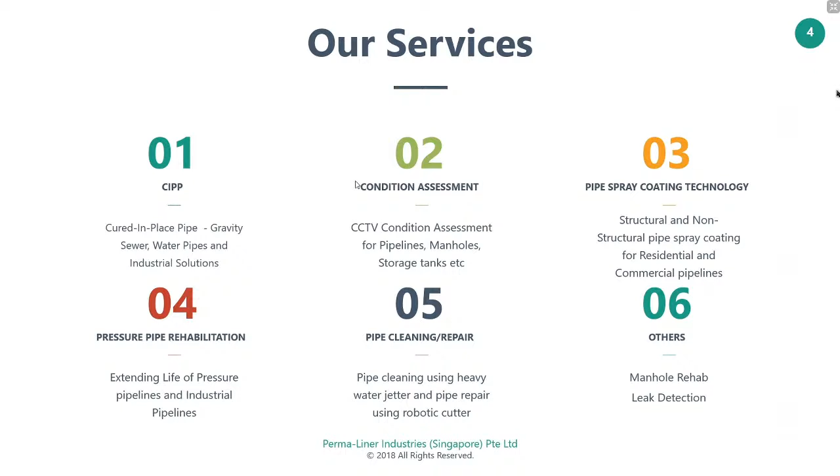repairing it. And apart from dealing with pipelines, we also deal with manhole rehabilitation and underground tank rehabilitation. Then in industry cases, we also undertake leak detection jobs, which I will show you in a case study we have done in Dubai. So first, this is our company introduction.

Okay, that was a quick introduction of our company headquarters. So we will start the topic. What is trenchless technology? Trenchless technology is subsurface construction work which requires few trenches or no continuous trenches. For example, if there is a pipeline of 80 meters underground, at 6 to 8 meters of depth, and there's a repair you need to carry out at 20 or 30 meters, you don't have to dig the surface and do the repair.

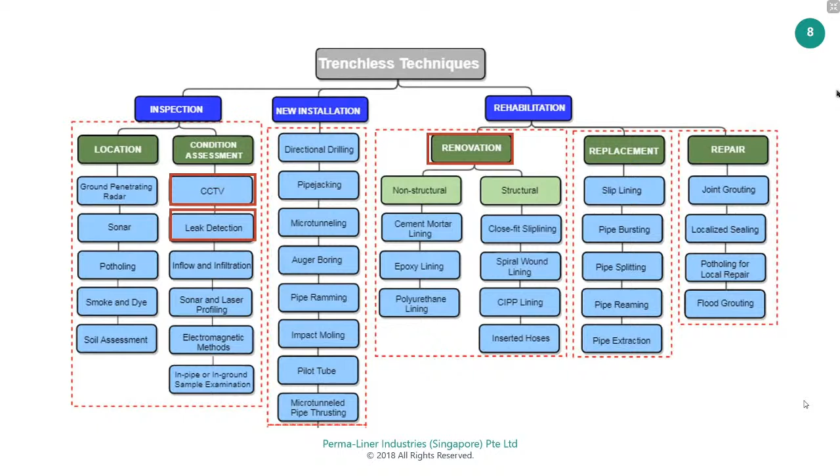So moving on to CIPP inversion lining system. So first I will show you the video, then we will go into step by step of how this method is installed. This CIPP inversion comes under renovation technique and trenchless techniques.

So in this method, for sewer pipes or whatever the underground pipe is, if the pipe condition is not good and we wanted to replace it, instead of putting the trench, we are going to do it in a CIPP inversion method system. So we will see a video of how it is done.

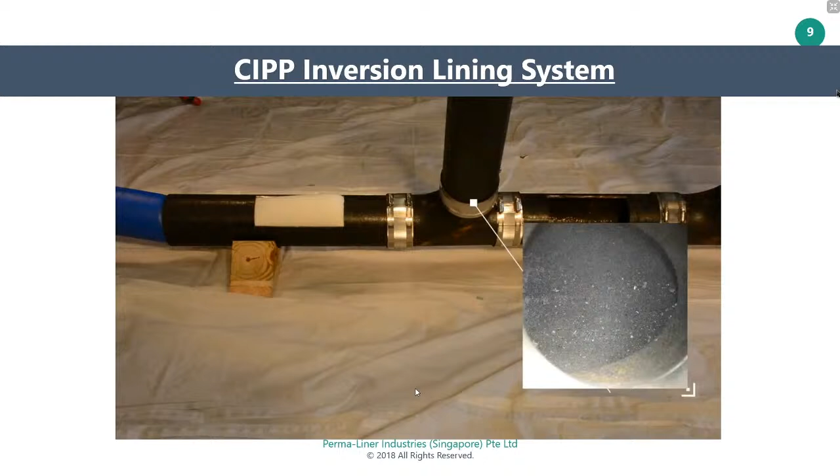This is how the liner goes inside the pipe. So when we give air, the liner inflates like a balloon and it starts inflating like this. So it reaches the other end of the pipe.

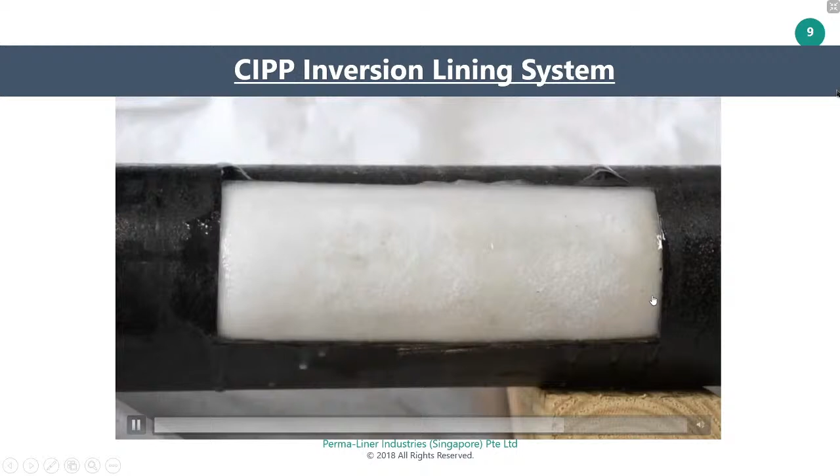So once we leave it to cure, it becomes so strong, and now once this becomes strong, the host pipe doesn't need to be strong, or it can crack or whatever happens. We don't need to care. So we basically form the pipe inside the pipe.

So once forming, we will send in this robotic cutter to reinstate the lateral connections. So this is how we will be doing it. Any lateral connections joining the main pipe will be reinstated back to their original position.

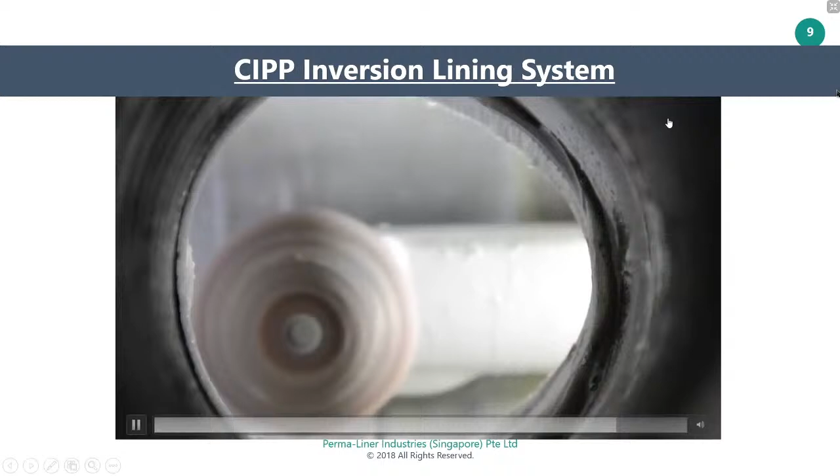So let me go through again. So first we do a CCTV inspection. So we will assess the condition of the pipe. Then after assessing the condition, we do the cleaning with hydrojetting, or we use any chain cutters. Later I will show. After this, this is the liner and the calibration tube.

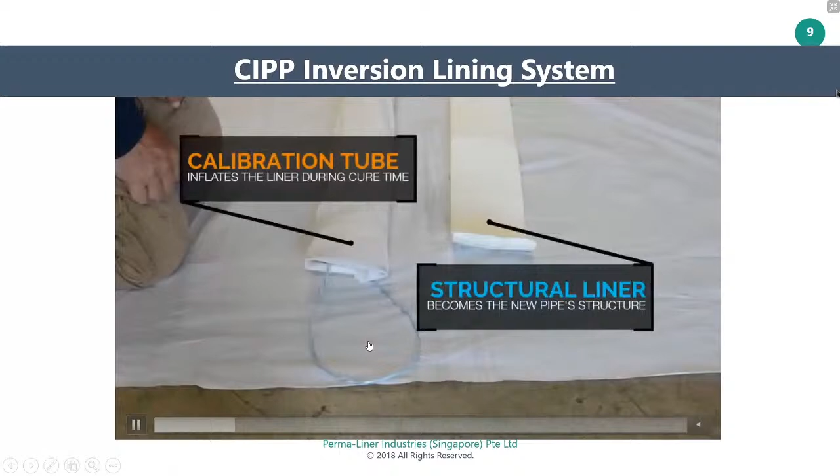So the calibration tube is to inflate the liner to the host pipe. So once we measure the liner size and calibration tube, we will pull it inside like this. You can see how they are pulling it. So once everything is pulled in and it is in place, now we start mixing the epoxy.

This epoxy is the main component here, because in epoxy there are always two parts, part A and part B. Part A is the resin and part B is the hardener. So usually in our system we use 2.6 kg per meter, 2 kg of part A and 0.6 kg of hardener.

And depending on the site condition, the hardener's quantity may increase or decrease. So once this resin is mixed, once you pour in part A and B together and you start mixing, your time starts ticking, because in the CIPP industry, it is like a time bomb. The time bomb means it doesn't explode, but if you mess up with this, your entire job will fail.

Because once part A and part B are mixed, the resin starts getting harder. Like how you do concrete work, once you mix the cement with aggregates, the concrete gets hardened, right? Similarly, the epoxy will also get harder. That's where the liner gets its strength from. So once the resin is mixed, you need to start counting the time.

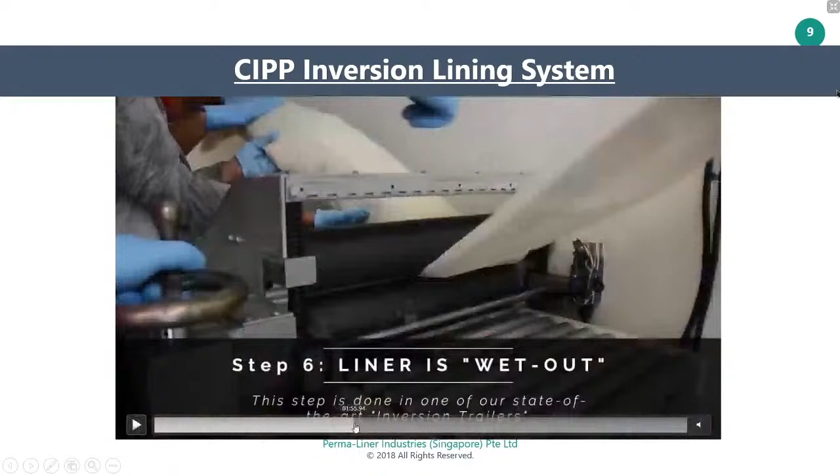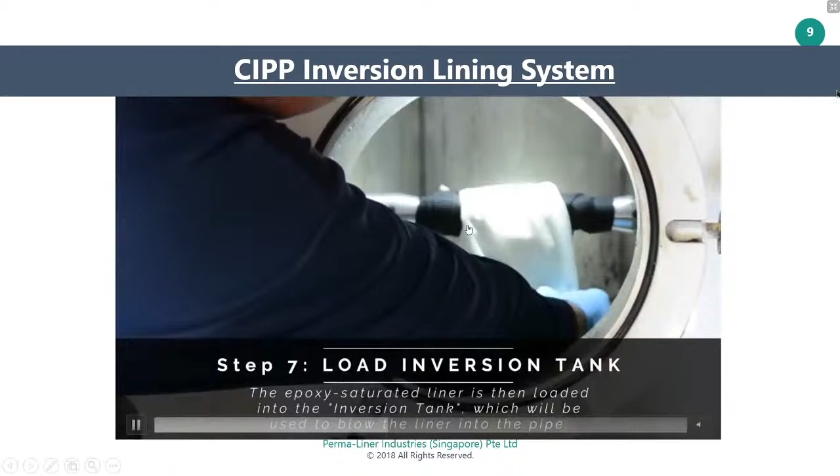So once they mix the resin, they pour the resin into the liner. After pouring into the liner, we will be wetting it out. This is the wet out process, and the machine is used for wetting out the liner. Wetting out is simply removing the excess resin from the liner. After it is done, we will insert the liner into our inversion gun.

This is called the inversion gun, the machine. At the tip of the inversion gun, just like how you put on socks, you clamp the end of the liner on the machine's outlet point. So we are clamping it here. After you clamp it, the end piece is fixed to the machine. Now you have to give air to the inversion gun. Once we give air, the liner starts to invert.

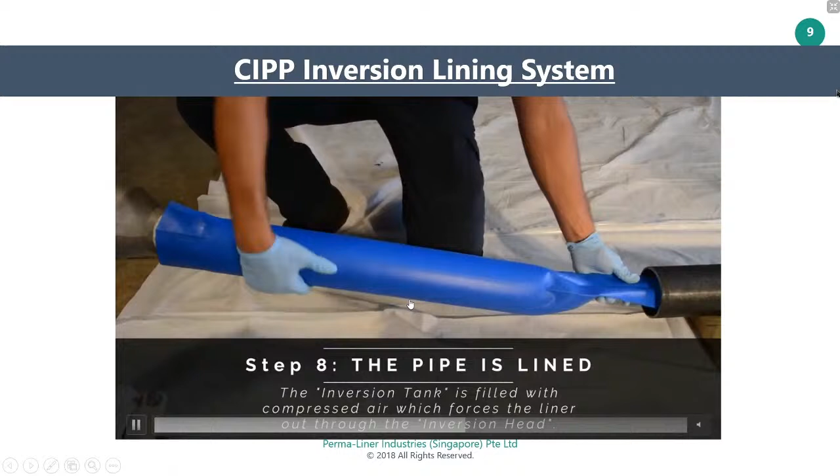So this is how the process is done, and this is how the name is given to it. We are inverting the liner. When air is given, the liner inflates itself like this, just like a balloon. That's the process going on here. Once the air comes in, it thrusts the liner outside, like inflating a balloon. And now you can see how it is flowing, how it is inflating inside the pipe.

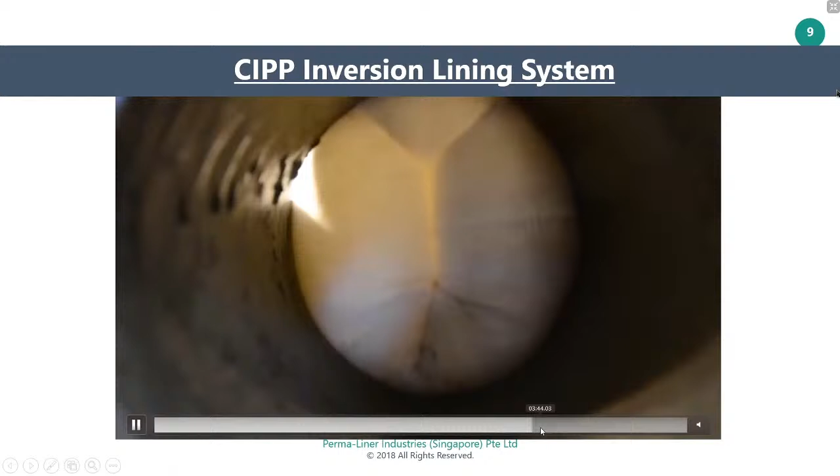So no matter the pipe size, whether 100 mm, 600 mm or 1200 mm, if you go with the inversion process, this is how the liner goes inside. Once it reaches the other end, we leave it curing for 2 hours. After that, if you see the surface of the liner, it will be hardened. So this is the basic thing.

And based on the video, you have seen the materials for CIPP lining. One is the liner, the calibration tube, then the inversion gun. Then we are using steam cure for this method. In cure method, there are a few options available. And for resin type, we use epoxy. These options are available for all jobs.

But depending on the site condition and the pipe condition, we will select which liner to go with and which installation method, whether inversion, winch in place or water inversion. In water inversion, instead of air, we use water to inflate the liner. We usually go for water inversion for bigger diameter pipes. And there is a curing method, ambient cure.

Ambient cure is nothing but... okay, I'm getting that the audio is low. Just a minute. Okay. I think you can hear me now.

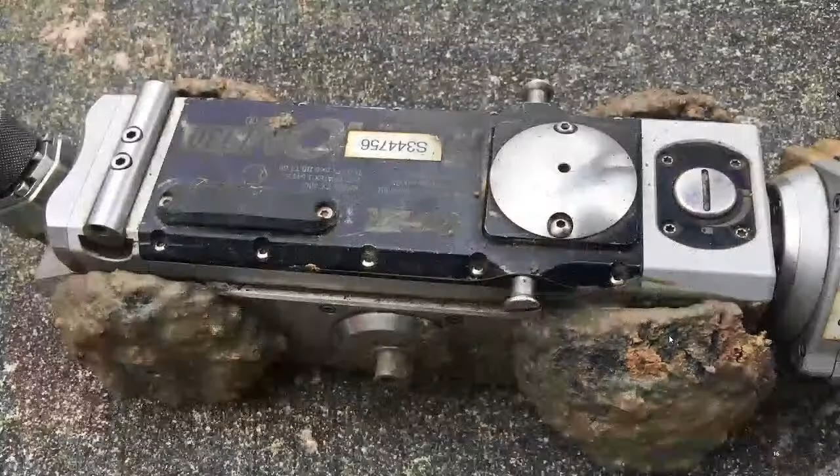And this is another camera. This camera is an explosion proof camera, which we can use in chemical industries, mainly oil and gas chemical industries. And you can see after the inspection how the wheels are covered with sludge inside the pipe. So this camera, though it looks smaller, is very powerful. The traction motor inside the crawler is quite powerful. So you can trust these cameras in all kinds of pipes, whatever the difficulty is.

And this is a robotic cutter which we use for our jobs. So you have seen in the video, after we install the liner, we need to reinstate the lateral connection. So to reinstate the lateral connection, we send in this cutter, we locate the lateral pipe connection exactly, and we reinstate it.

And for the lining job, we use a compressor and a generator. These are the basic equipments we use for every single job. So this is all for the inversion lining system. Inversion uses this equipment, the top gun series or inversion gun.

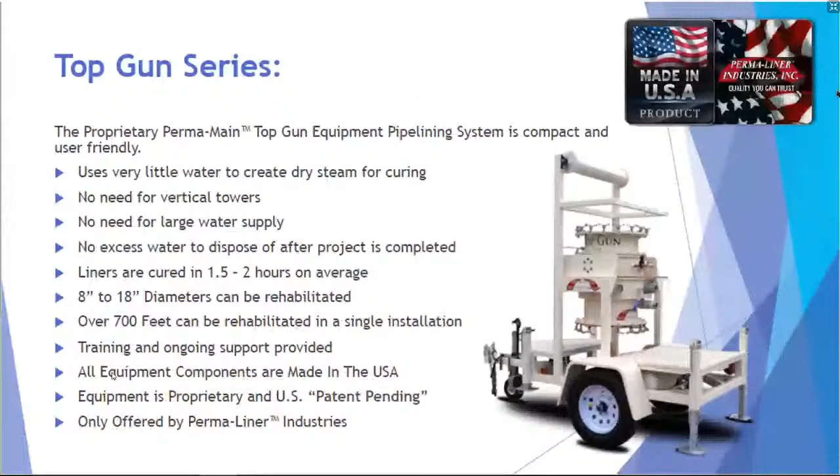There is another method called pull in place lining system, where you don't require the inversion gun or top gun series. You just wet out the liner, you can pull the liner by yourself and inflate it. So that is the difference here, and I will quickly show you a video.

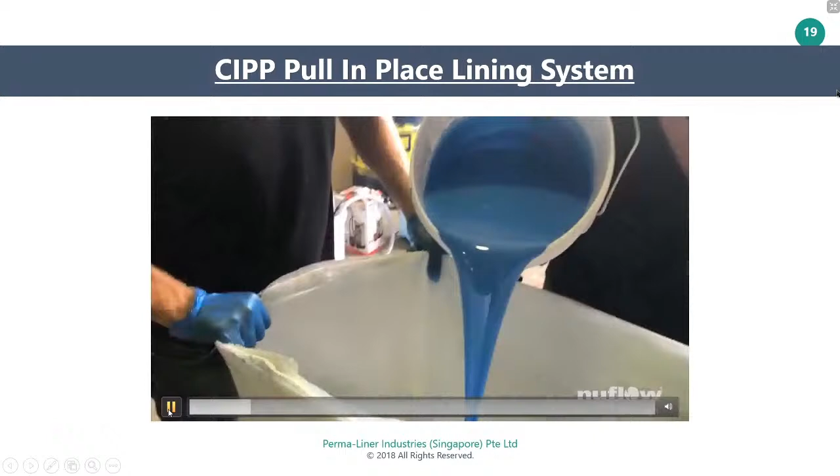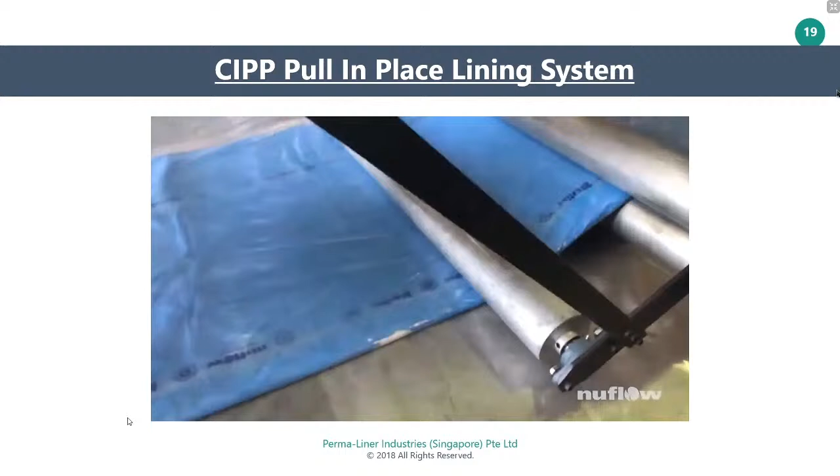They are mixing the resin here, part A and part B. So now the mixed resin is poured inside the liner. After pouring the resin inside the liner, they are wetting out, saturating the liner with the resin. So all the excess resin will be taken off. You can see how they are doing it. It's a roller.

And another thing is these rollers you are seeing right here have specific calculations to account for. For example, if you are using a liner with a thickness of 5 mm, then this roller gap should be 5.5 mm, 0.5 mm higher. There's a calculation based on the different kinds of liners and resin we use. So we cannot use these rollers just anyhow. We need to exactly measure the rolling gap we require for this liner, set the exact gap, and then wet out the liner.

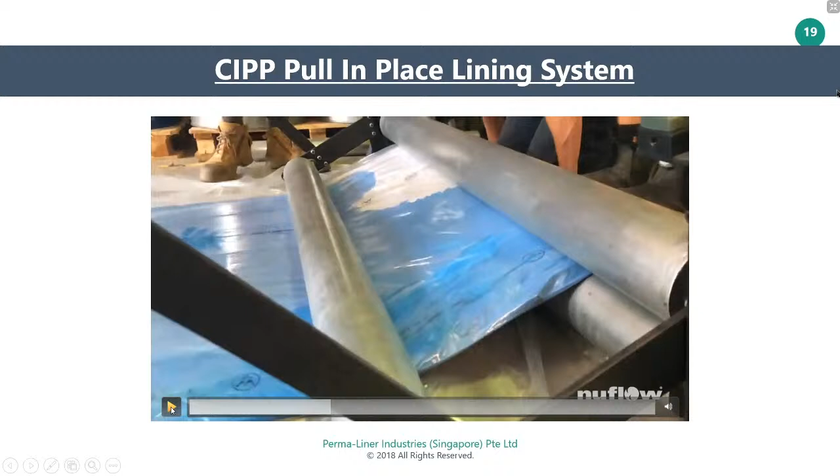This is one of the quality control methods, to not have excess resin inside the liner. If you have excess resin inside the liner and you cure it like that, you will see lining failures. So we don't want that to happen. Excess resin must be removed in the first step itself. So the calibration tube is inflated inside the liner.

Now they are pulling in the bladder. The yellow color which you see is the bladder, which will be pulled inside the liner. If you look inside this bladder, you will see a tire tube. You can imagine how a tire tube looks, but in the longitudinal direction. So inside this yellow bag, you have a rubber tube. It looks like a normal car tire tube.

So the inflation is done to this tube inside. We call this a bladder system. You can see the liner is wet out, and after the liner is wet out, we are pulling the bladder inside the liner.

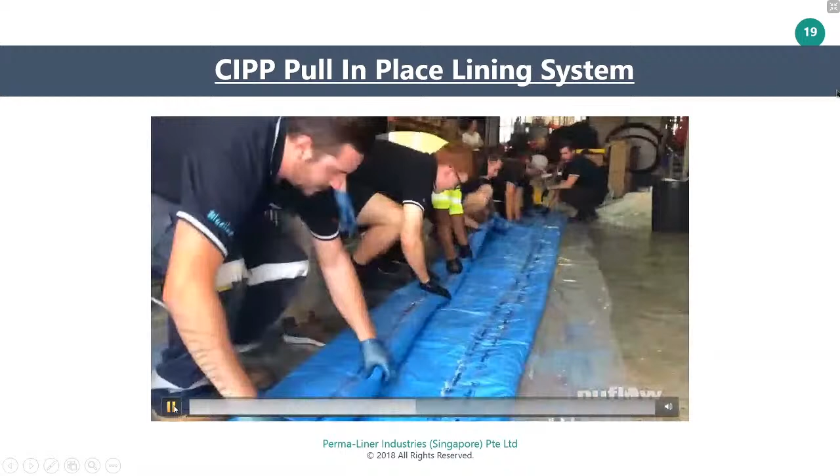After the bladder is pulled in, we need to send this liner inside the pipe. But you cannot send the liner without folding it, because if the pipe diameter is 600 mm and your liner is also 600 mm, you will have difficulty pushing it in. So to avoid that friction and the excess force required to pull, we fold the liner in 3 folds. You can see they will be doing 3 folds.

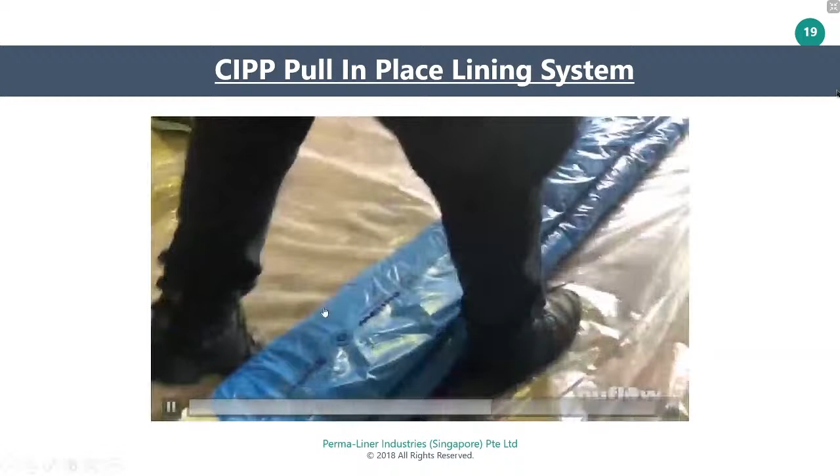Once the 3 folds are done, we use a masking tape to hold them. They secure the fold like this, at about 1 meter intervals. After that, you can directly take the liner and pull it inside the pipe. So he is tying the rope to the bladder, and you can see they are pulling it inside.

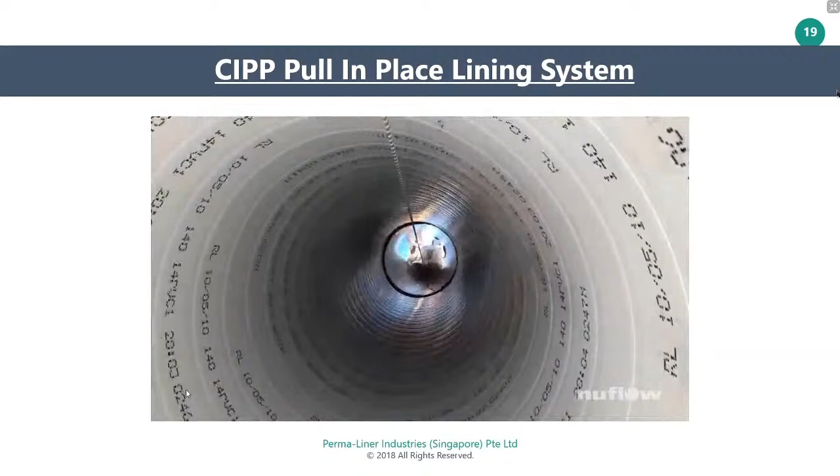After the liner is pulled in, as I mentioned, this yellow color bladder, right? Inside it, you will have a tire tube-like structure, and you're just passing the air inside the bladder. So once you pass the air inside the bladder, just like how our vehicle's tire tube gets inflated, the bladder also gets inflated. And as you know, in the previous step, after this bladder, there is liner inside also. So the liner will take the shape of the pipe.

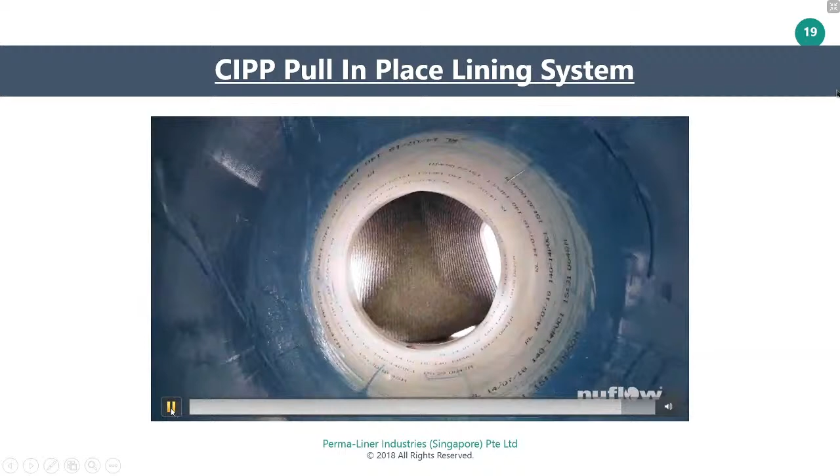So this is how it will look after the installation. So once the liner is cured completely, you are going to release the air in the bladder. Once the air is released, you can remove the bladder, just pull the bladder outside, and here your liner will stick to the host pipe, and it will take the shape of the host pipe. So once it cures, it looks like a brand new pipe.

And all these things are polyethylene sheets. It is a covering sheet. It is the first layer of the liner inside it. So this polyethylene sheet is given to protect the liner from sewer waters and harmful gases. It is the first line of defense for the liner. So this is how it looks.

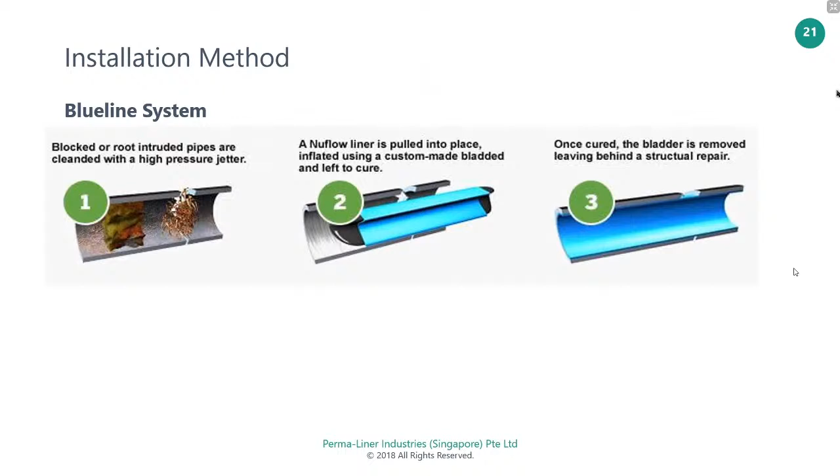So in the pull-in-place method, you're not going to use any inversion gun or big equipment to install the liner. You're going to wet out the liner, pull it in place with manpower or just one winch. Then you will inflate the liner and let it cure. That's all. So this is the three-step method of how it is done. So you already saw the video. And now we move on to the next system.

UV lining system. So far, I will just recap. We have seen what trenchless techniques are, how many trenchless techniques there are, and particularly we went into detail about the CIPP inversion system and pull-in-place system. So in the past two videos, you have seen two methods, and this is the third method in the line. And here the method of pulling in the liner, everything is the same. But as the name UV lining suggests, the difference is, once the liner is pulled in place, you're not going to use air or steam to cure the liner. You will be using UV light to cure the liner.

And this UV light, right, the liner is already light sensitive. I mean, it is a glass fiber reinforced liner, and the resin is sensitive to UV light. So if you put this liner under the sun, it will cure by itself because of the UV light present in the sunlight. And to store this liner, you need to keep it in dark boxes, and the temperature of the liner must always be within 22 to 25 degrees Celsius. So once you take out this liner and install it in the pipe, until you pass the UV light, it will not cure.

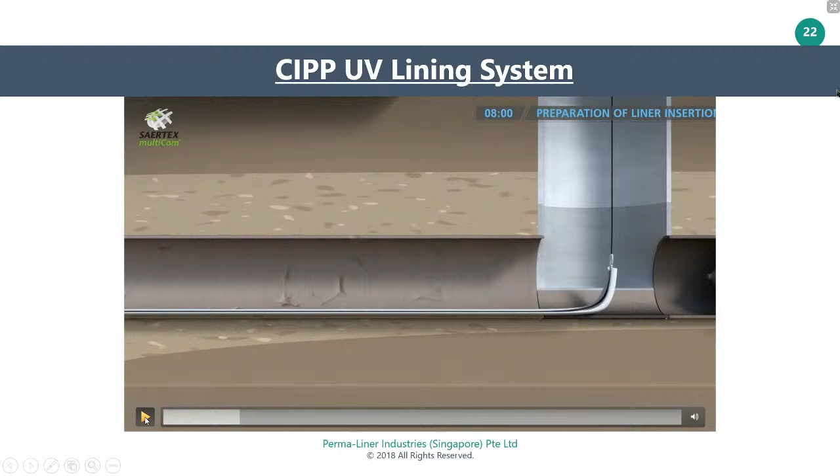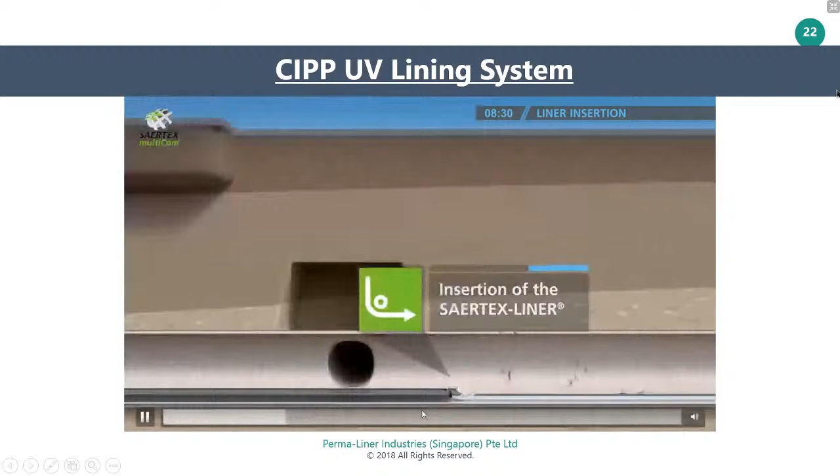So we pull in a gliding sheet. This gliding foil is like a plastic sheet. First, it will reduce the friction, and it will prevent the liner from getting damaged when we are pulling it. So it will protect the liner. Notice how we are using the cable. Once the cable is established, we will use the same cable to pull in the UV light cable also. So now the cable is connected and the liner is pulled in. You can see the liner is pulled in.

After the liner is pulled in, inside this liner we will have one small cable. This cable is called pull tape, and this cable is mainly used to establish the rope for the UV liner, I mean for the UV light to enter in. And at the top you can see the cap, or we call it a packer.

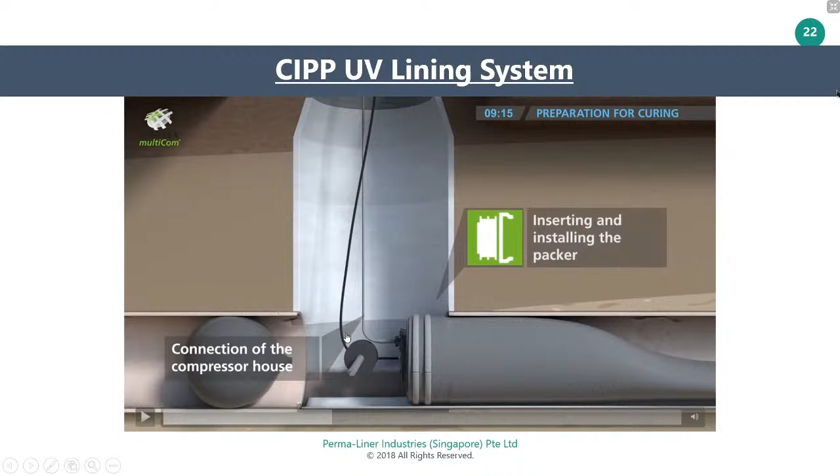So what we will be doing is we will connect the packer to one end of the liner and the other end also. You can see two hoses running: one hose is for the compressor or air blower to inflate the liner, and the other is for the UV light. So the cable is there, we will be pulling it. Once this high strength cable reaches the other side, we will connect the UV light to the cable. Once the UV light is connected, we will close the other end of the liner also. That's all.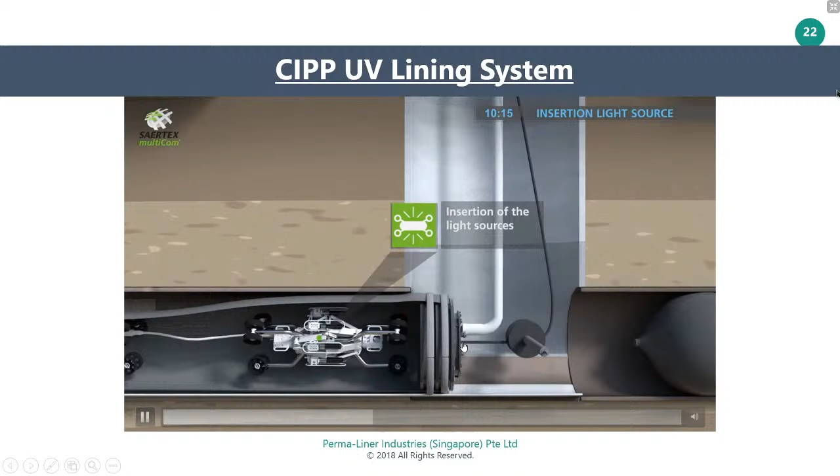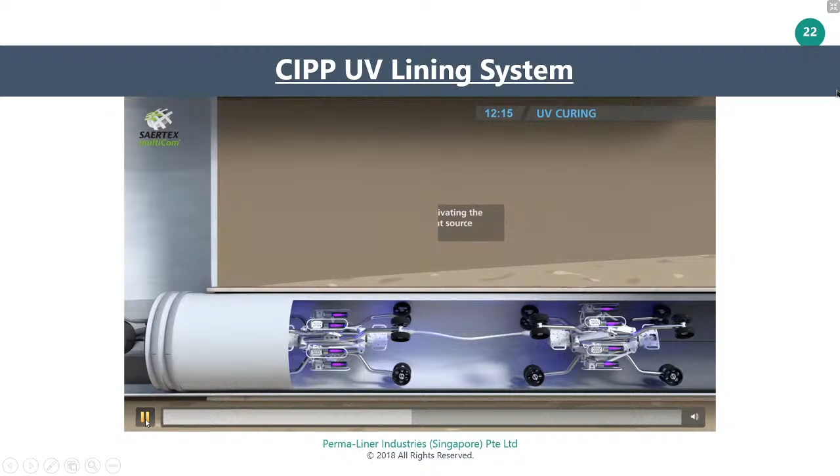Once the UV light is inside, we will pull it to the start of the manhole. Now it is at the start. Once it reaches the start position, the operator above the ground will turn on the UV light sources. Once the light is on, the chemicals inside the liner start to react to the UV light, and it starts curing and getting harder. And there is a timing for each pipe diameter for what speed you need to pull this UV light. So slowly they will be pulling this light.

All this pulling is done by the machines, so it is an automatic process. We will input the diameter, the pull speed, everything, and the light intensity. It will be set in the system, and the system automatically pulls this UV light from one end to the other end. So the main advantage of UV lining is once you install the liner, pull the liner, and start the UV light system, you don't need to look at it. The system does its job, and you will get the results.

Once the curing is completed, you will not remove the UV lights until they cool down. If you look at or are exposed to the UV light, you will have health issues. So once the light is cooled, we will get an alert in the system that we can remove the UV lights from the liner. Once the system alerts us, we will remove it.

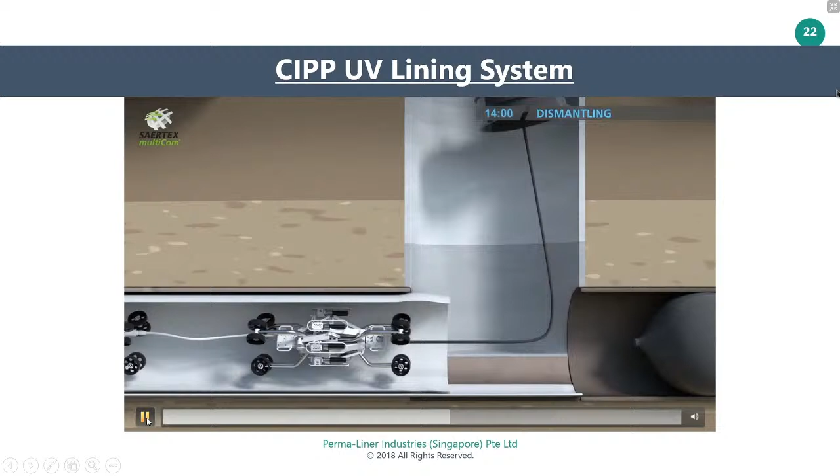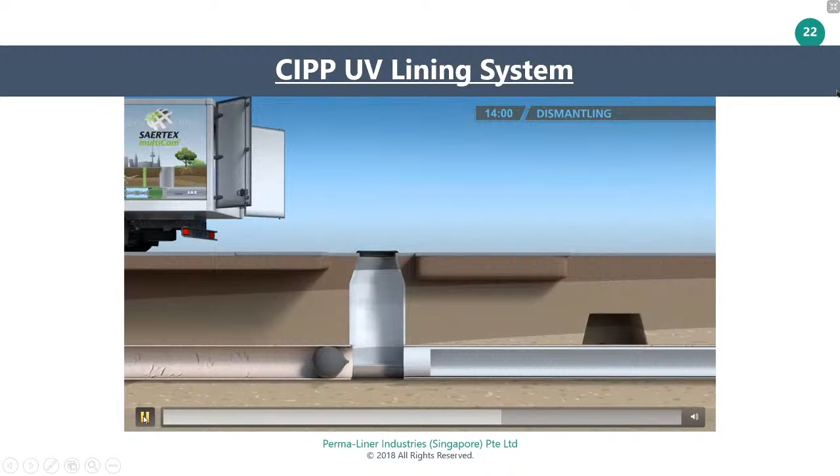Now this sheet you see, right? This sheet is a plastic sheet. It is for protection against overexposure to UV light. So this sheet is one step of quality control. Once the liner installation is done, this sheet will be peeled off from the inside and removed from the pipe. Now this is the robotic cutter entering, and it will open the lateral connections inside the pipe.

So this is how the UV lining is done, and this is the exact machine you are seeing. On the left side, you can see the UV machine. This is the machine which controls the UV lining job, and behind it you can see a generator to support this machine. This is the entire vehicle we use for the UV lining job. So you take this one lorry to site, and you will have 50% of the equipment, and in another lorry we will bring in the liner.

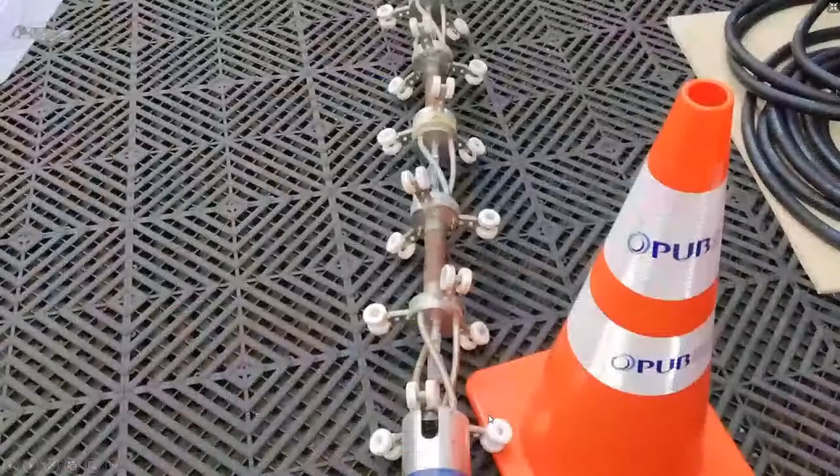This is how the UV light looks. This is for smaller diameter pipes up to 300 mm. You can see the wheels here, and you can see the lights over here. In the middle of the system, there is light. This UV light bulb is changeable, so if it gets damaged or spoiled, we can change the bulbs easily. The cost of the bulb is in an average range, about 1,000 euros or something, so it is not a big deal. And when you get new equipment, you will have extra bulbs also.

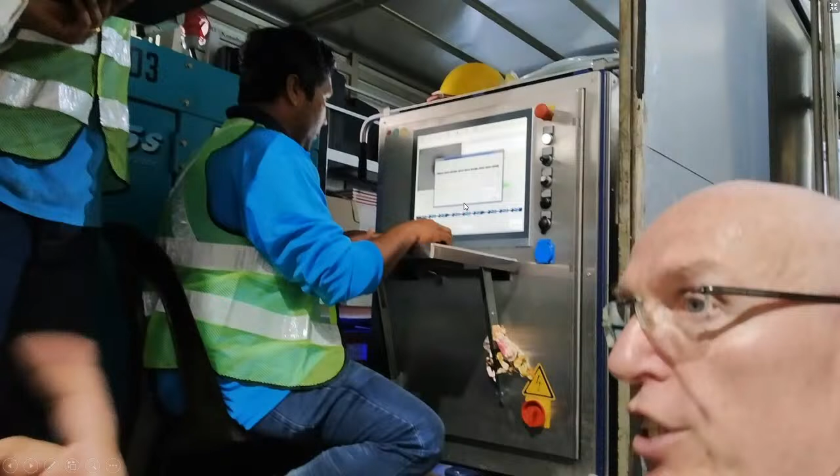And this machine has a computer attached here. This is how the operator sits, and he controls the equipment. So basically, before the UV light even goes inside the liner, we input all the data of the liner and the host pipe: diameter, length, pipe material, liner resin type, the number of bulbs used, the exact manhole to manhole distance, and other conditions such as whether there is any infiltration of water.

For example, if any infiltration is there, then the light intensity should be higher. If water touches the curing liner, it will cool down the liner and it will affect the curing time. So in order to avoid that, we need to increase the intensity of the light. So once all these data are set, you just need to switch on; you are seeing a blue button here. Once every data is set here, you just need to click this button. After that, you don't need to worry. You can just sit and watch how the liner is being cured.

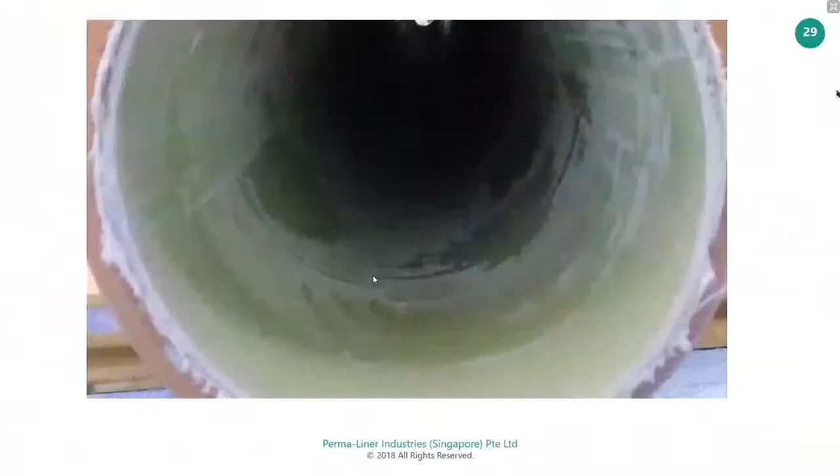There's a camera inside the UV train, and it gives you a live feed of the pipe. So after lining is done, this is how it looks. And in this case, we have not removed the polyethylene sheet yet. So you can see after curing how it looks. It looks green in color.

Okay. So far we have seen three methods in detail: CIPP lining system by inversion method, then pull-in place method, then UV lining system. So these are the overall methods we have been using. So once you know all this, it's just like you will have liner, you will have resin, you're going to mix the resin, and you're going to pour this resin in the liner. You're going to pull it inside the pipe, then you are going to inflate it like a balloon. After that, you're going to wait and cure the liner. After the liner is cured, your job is completed.

That's it. So this is the general overview of how the actual job is done and what the technical considerations are. It is not like it's just a sewer system, so we can do it anyhow. It doesn't happen like that. And since we are dealing with industry pipelines, each pipeline costs money. For example, we have done a job in Shell, Singapore.

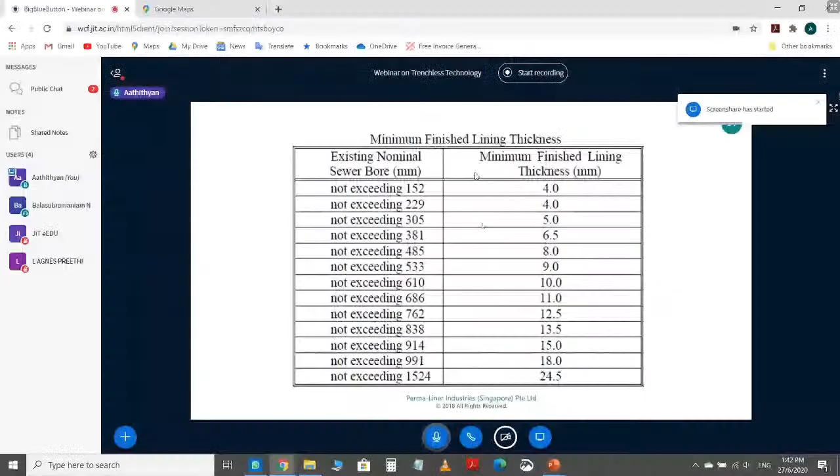So these are the properties of the cured in place lining system. Whichever lining method we use, it is no problem, but after installation the liner must achieve these properties. In Singapore, PUB is the Public Utilities Board. Sewer lines, drinking water pipelines, drain lines in entire Singapore are controlled by them. It is a government authority.

For PUB jobs, we need to show them the proof that our liner matches this criteria before we even install the liner. In private industries also, they will ask for these properties: what are the technical properties of the lining system? So this is it. And quickly we go into the planning step now. So you know how the liner is.

So we have spoken about the lining system and how it is being installed. Now you can have some imagination. Okay, this is the process, but how is it done actually on site? So I'm going to show you how it is done on the site. These are the 8 steps. SIP means Sewer Interpretation Plan or Sewer Information Plan. I will show you a sample SIP here.

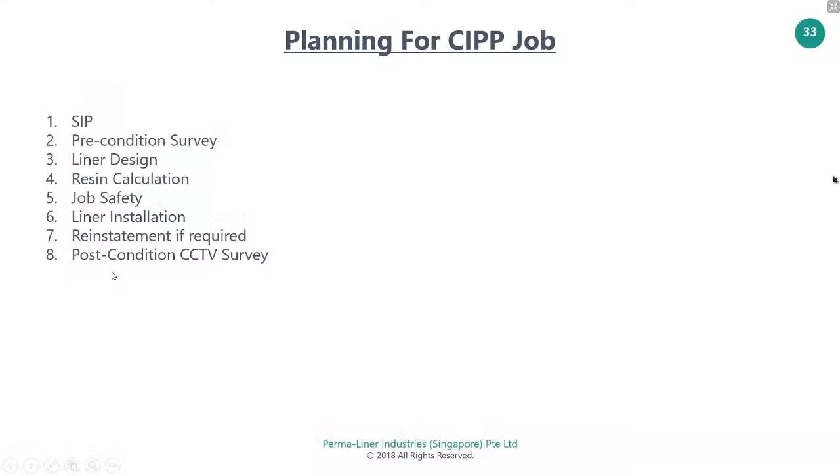Once we locate the pipe, then we need to do a precondition survey, then liner design, resin calculation, then job safety must be planned, then install the liner, reinstatement, post condition. So quickly we will go into the details. This is the SIP as I mentioned.

In this, I have already marked the sewer pipes. This job we are undertaking now, and last week my team went for a pre-con survey. The marked pipes are the ones we are going to rehabilitate. All these lines fall near the road and on the roadside. If you notice, this pipe is 35.73 meters of 300 mm diameter, this is 113 meters of 300 mm again, and 118 meters.

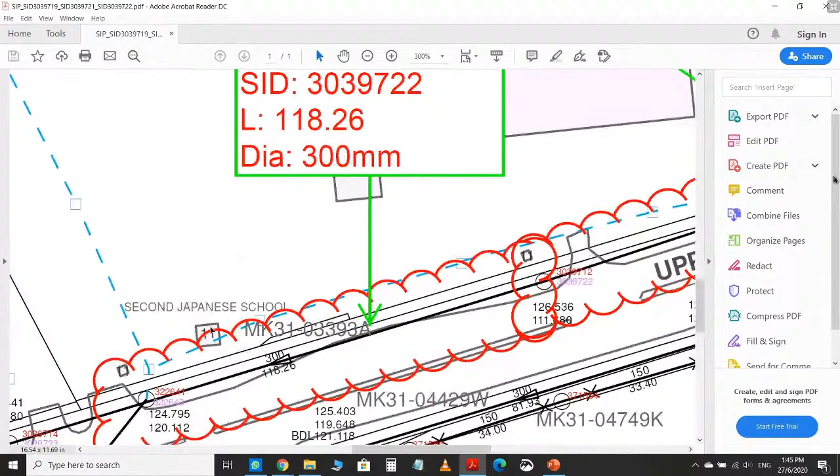The client is PUB, so they don't want to replace the entire length by open cut method because of the road area. And behind there's a school here. You can see from the map, the Japanese school entrance is here. So we can assume that this is the school area and this is the road area. Once we get this map, we study this map.

This red one is the manhole ID and the violet one is the sewer ID. Every manhole has a manhole ID, and every line has one sewer ID. Here the manhole ID is 3039708 and the downstream ID is 3039711. For a pipe, you basically have upstream and downstream. Since it is a sewer pipe, the flow is gravity. We determine upstream and downstream by the flow direction here. So 708 is the upstream and 711 is the downstream.

Usually the liner should be installed from the upstream direction where the pipe flow is actually happening. And you need to know the depth of the manhole also. Here you can see two numbers, 126 and 112, and the difference of these two numbers gives you the manhole depth. So that's all. We have the pipe length, manhole IDs, sewer IDs, and pipe diameter.

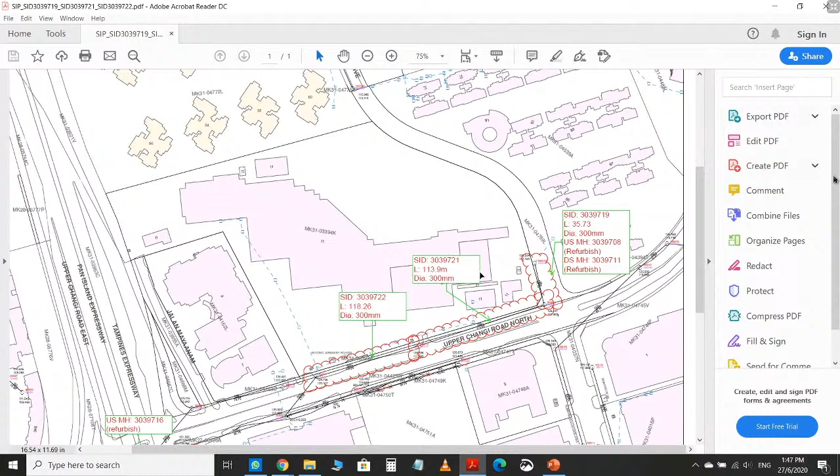Now what we need to do is see the actual site before we even mobilize our vehicles over there. Because we need to mobilize a few vehicles like the jetter truck and everything, we need to see the location beforehand. So this location is Changi North. I'm showing this because in Singapore the sewer information plan is very accurate, and before you even go, you can see the exact manhole ID in the map.

So we open the map here. We see Upper Changi Road North. Okay, and now we are in Upper Changi Road North. So now we need to locate this pipeline. You see at the back there is a unit number 11, right? You can see the number 11. So you just put 11 Changi North and here you have it.

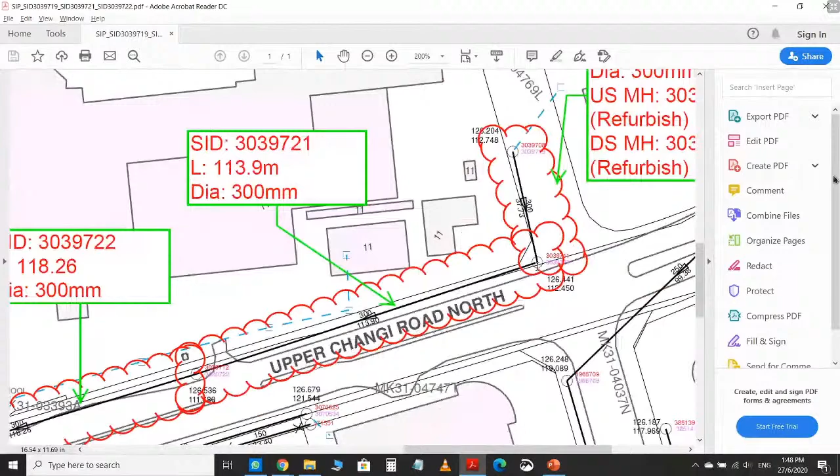So now I will go into the street view. Now we are in the exact location. In the map you can see there is one manhole ID here, this is the road junction, and here is unit 11. At the corner of it you have one manhole ID. If you locate this, you can locate the other entire lines. So I'm going to locate this in the actual area here. If you come a little bit here.

You can see here, this is the manhole. I hope you can see it clearly. Just a minute, I'll zoom in. Okay, you see here, there is a manhole in the corner. This is the manhole. And if you see the distance from this manhole to the upstream manhole, it is 35.73 meters. So from here, if you go this way, you should see the other manhole in 35.73 meters.

Wait a minute, I will zoom out. So we located one manhole here, and from here, 35.73 meters is around here. If you want to do a measurement, you can measure from here and keep a distance of approximately 33 to 35, and you can see how the location looks. Opposite you have a building. Then just like previously, you need to drop a man here. Then you need to go this side and survey this side.

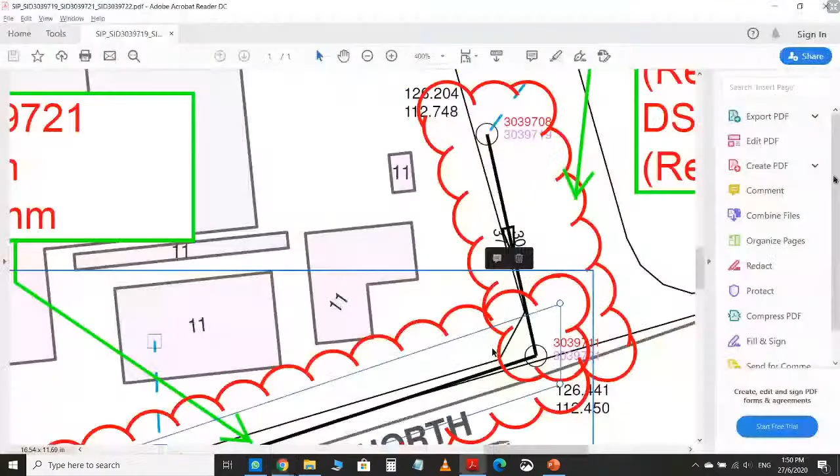Let's locate the other manhole also. Here it is. So you found the other manhole here. If you look from this side to the opposite side, we have the building here, as we saw in the plan view. So this is how we locate the manholes before we even go to the site. Once we locate the manholes, one is here and the other is somewhere around here as per the plan. So once we've located the manholes, what is the next step?

Pre-con survey, then liner design. Okay, I will go into liner design first. I will quickly show you the calculator we use for day-to-day jobs. This is the liner design sheet, and Applied Felts is one of the liner suppliers. You see here pipe diameter. The pipe diameter is 300 mm. Okay, 300 mm. And the external diameter changes automatically. All these values are input already. You don't need to change them.

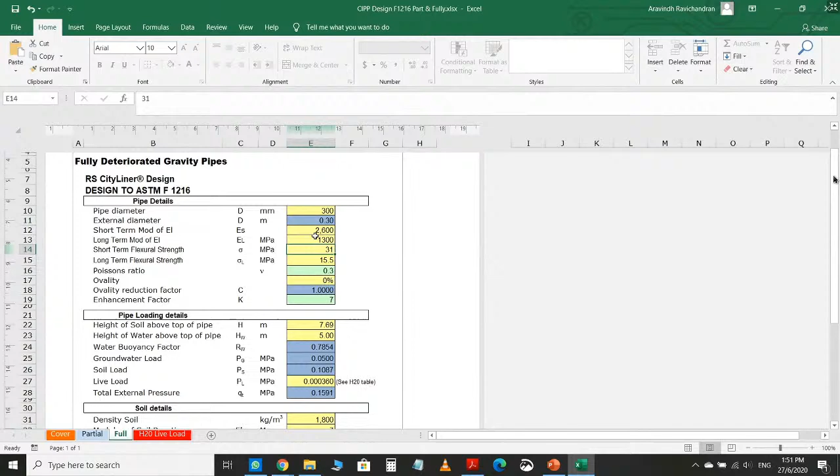And ovality factor: if the pipe is oval in shape, you can put the percentage here. If not, leave it. And height of the soil above top of the pipe. This is the depth of the pipe. So now you need to know the exact depth of the pipe. You have two depths, one here and one here. You always need to take the downstream manhole depth because it is higher than the upstream.

So the exact calculation is 126.441 minus 112.450, so it is around 13.98. The exact manhole depth is 13.98. We will put 14 meters. And height of water above top of pipe: you need to account for the water also. Usually in Singapore, if you go below 5 meters depth, you can see groundwater inflow. So 14 minus 5 is 9 meters. We will assume 9 meters.

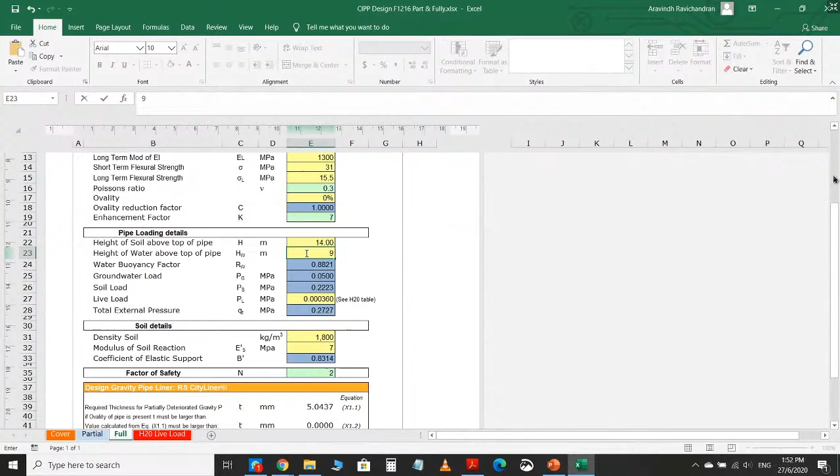Once you input this detail and this detail here, and come below, with a factor of safety of 2, you will get the liner thickness, 8.28. That is for a fully deteriorated pipe. There are two thicknesses, partially deteriorated and fully deteriorated. Partially deteriorated is when the pipe is in half good, half bad condition, so you can go for partially deteriorated. If the pipe is in fully bad condition, you need to go for fully deteriorated. In Singapore, partial thickness calculation is no longer approved. They've done away with it, so we only follow the fully deteriorated liner thickness.

So 8.28, the closest thickness around natural number is 8. So we need to have minimum thickness of 8 mm liner to install here for this line. So now we know the liner design, which we also calculated from the spreadsheet. It should be 8 mm thickness. So after we found out the thickness, we just need to order the liner and wait for it.

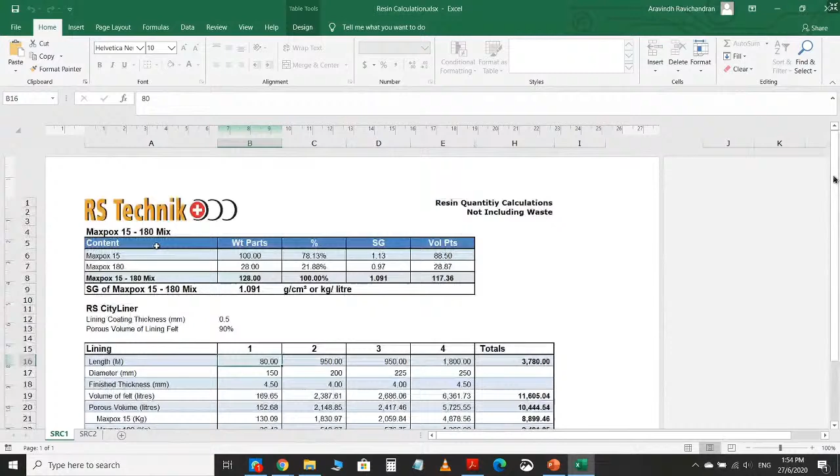Next part is you need to calculate the resin quantity. Okay, so liner design is one part and resin quantity determination is the other part, because you don't want to waste resin also. There's a calculation for resin. All this we have inputted the data previously and we use this for our job. If you see, we are using two-part epoxy resin, part A and part B, and their percentages, then mix ratio, then their consumption rate is included, and porous volume is also accounted for.

Now we need to enter basically three details: length, diameter, and finish thickness. When we enter these three details, we will get how much quantity of resin part A and part B is required, total resin, and cost per length. So now we need to open our map. So now we are seeing 37 meters. So total length is 37 meters plus we need to have 5 meters excess for tail end, and we need to account for the manhole depth also.

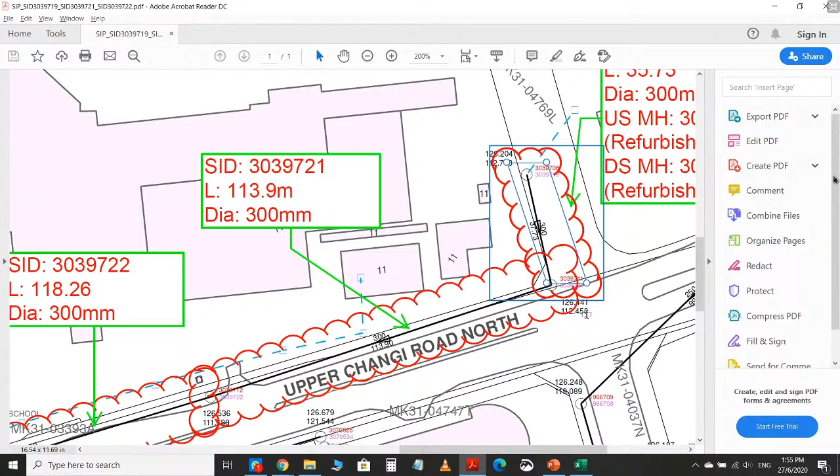Previously we calculated manhole depth as 14 meters because you will be installing the liner from the top surface. That means your liner needs to pass the manhole depth and then go to the pipe. So 14 meters. Now it comes around 56 meters. Then usually you need to add 2 more meters for a factor of safety. So 58 meters. So we input the length as 58 meters. For 58 meters, now we need to include the diameter. Diameter is 300 mm, so we input 300 mm. Then liner thickness we calculated as 8 mm, so we put 8 mm.

That's all. You will get part A resin quantity, part B resin quantity, total resin quantity. So this is the resin quantity we require. And from this resin quantity, you need to have 5% wastage also. You need to calculate an additional 5%. So this ensures that we don't get stuck in any process. Yes, sir. So that's all. We have done the third step also.

Now we are going to look into job safety. So job safety is nothing but when you're executing the job, you need to have a few documents in place. I will show you what it is. So this is the daily toolbox record. So before we even begin the work, we will put up a toolbox meeting and we will explain to our workers what needs to be done and their names, what safety PPE they require, then the list of things we need to comply with, then what are the hazards involved in the job.

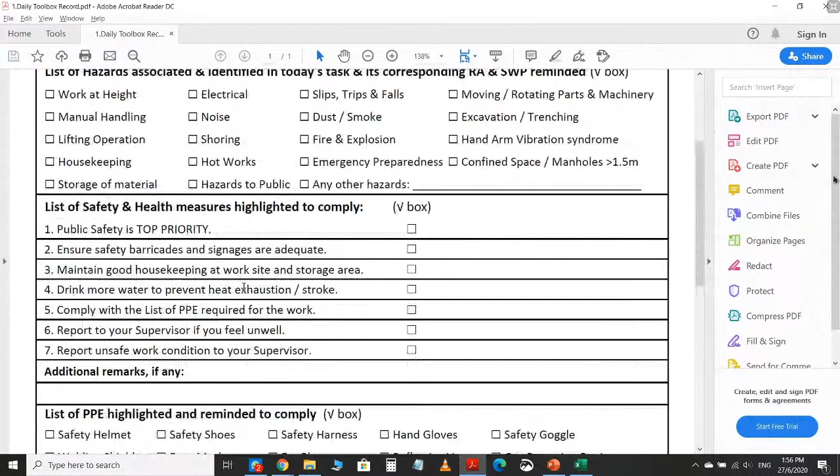So are we going to work at height, are we going to do manual handling, housekeeping, then are we going to use any electrical items? Does the job involve slips, trips, falls, are we going to create dust? Or is there any fire involved in the job? All this needs to be explained to the workers. So after this toolbox is done, you are going to enter the manhole. Before the worker enters the manhole, we need to open a confined space permit. This ensures the man goes in, does not die inside the manhole, and comes back.

So this is a safety mechanism, and it is by law in Singapore to have done all this safety permit system before we even start the work. This ensures that each and every job and each and every task involved in the job is being done with a safety mindset. So we don't just do the job, we do the job in a safe manner so that all the workers come to work and return home safely, not just come here and die inside the manhole. So this is how the safety system works here.

You need to fill up all this, and here you can see the confined space assessor must evaluate the manhole for safe gases. And I can show you, this is the gas meter. If you see the gas meter, it will have readings here. You take this gas meter and you will have a tube connection from here. You need to put the tube inside the manhole and watch out for the readings. So the safe oxygen level should be 20.9. The meter should show 20.9%. So if it is 20.9, you can enter the manhole.

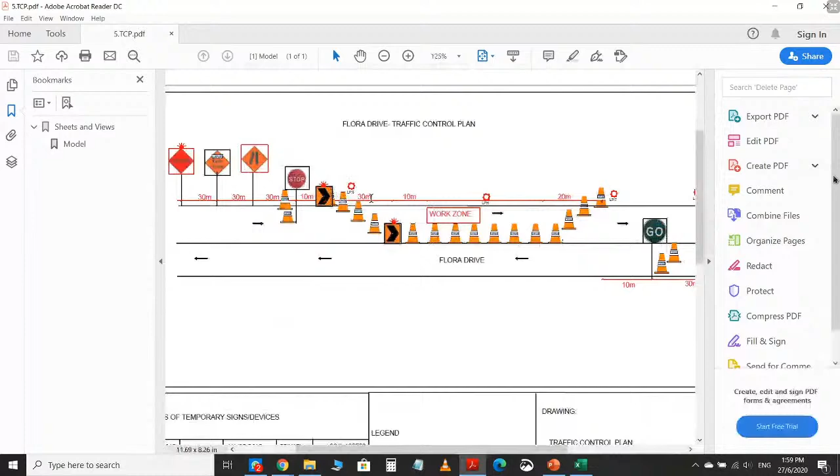We should assess the manhole. We should assess the underground infrastructure first before entering it. So after that, since we are parking on the roadside, we need to have a traffic control plan: how we are going to park our vehicle and how it is not going to disrupt the road users. So this is the traffic control plan. In the work zone, we will be parking our lorries to do the survey, and you can see the traffic control devices placed here.

And safety measures are by law, and TCP also is by law. On any Singapore road, if you are going to occupy the road, you need to have this TCP plan submitted to LTA, the Land Transport Authority, and get their approval. So you need to submit this plan and work area, location, everything, and get their approval.

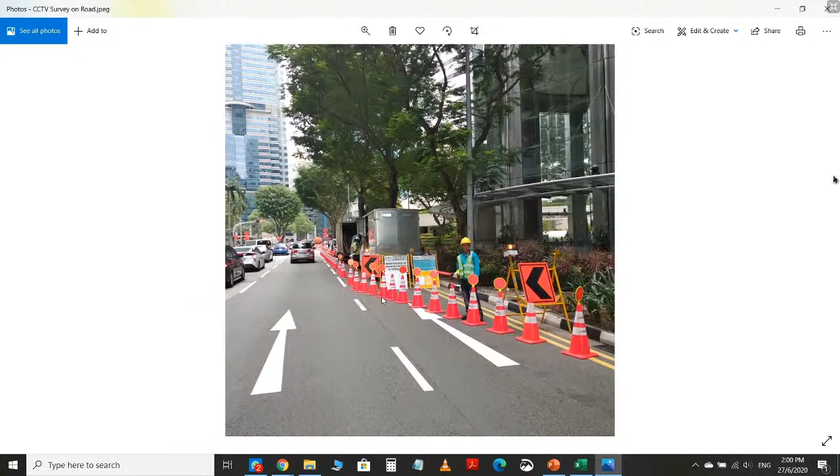So we'll see safety photos here from our site. This is the emergency assembly point or rest area. In every site, you need to set this up, and it should have safety equipment like fire extinguisher, SCBA, tripod, everything. And this is one of the jobs we have done last month. You can see how the traffic safety cones are placed, and you can see the signboards, diversion. Then there's a traffic controller here, and there are two vehicles parked over here.

So this is how we've done it, and you can see the access to the manhole near the roadside, and behind this picture there is a tanker. It is the downstream manhole where we clean the sewer. It is again a rest area. And this is where you put all your permit papers and signboards. You can see the organization chart, then safe procedures, risk assessment, and the permit paper, toolbox paper, everything.

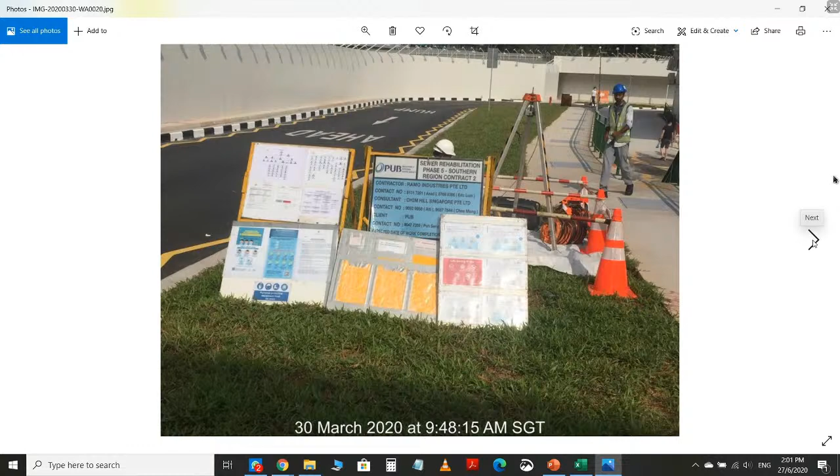And instead of replacing it with a new pipe, PUB wants to rehab the pipe, because if we replace this entire pipe, you need to remove this entire section and place a new section, or you need to divert this. So it would take another 1 month to complete this job. We don't want to waste 1 month just to settle these 3 leaks. So we took only 3 to 4 hours in the night time to complete this job.

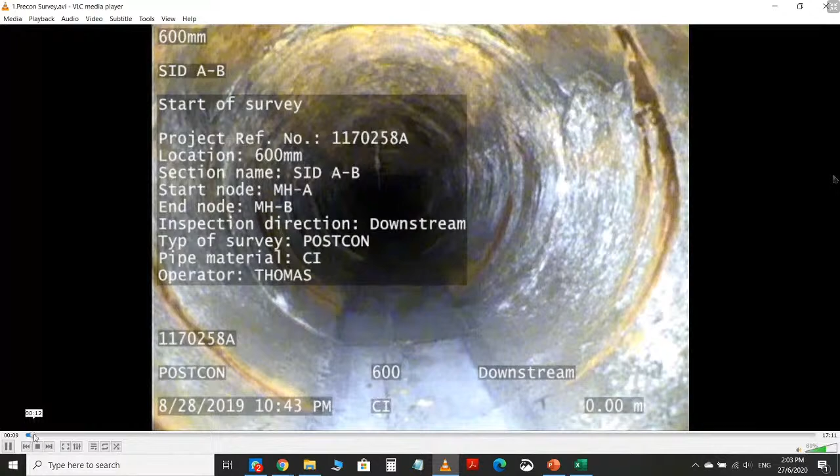So this is the pre-con survey. I hope you can see my screen. You can see the project reference number, location, then pipe diameter, everything. And if you fast forward, you can see the precondition. This is the actual CCTV survey done inside the pipe. You can see the pipe condition, how it looks.

It is a cast iron pipe, and you can see the scaling formed throughout the pipe. In this condition, it will be quite difficult for the pumping station to operate, and since it has major leaks, they need to rectify these leaks also, because their pumps will have malfunctions. And you can see how hard the scale formation is.

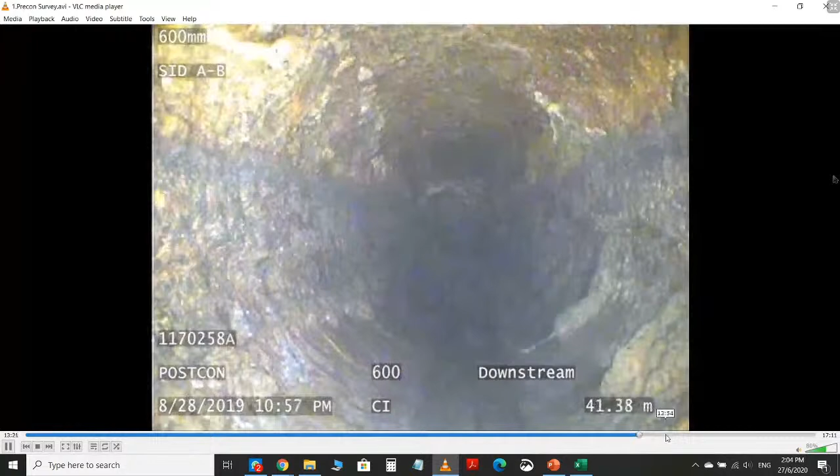So I will just forward it. So this pipe, once we renew it, the flow rate will be increased, so that from the city side more sewer water can flow into the pumping station, and from the pumping station it goes to the treatment plants. So that is the main objective of renewing this pipe.

We can leave it as it is, then after 1 or 2 years it will completely collapse. And if this pipe collapses, from the other side of the city the sewer water, wastewater cannot pass to the pumping station and to the treatment plants, then it will have a major consequence in health and safety of the public. Because if this pipe is not working inside the city, the manholes get filled up and overflow will happen, which the Singapore government doesn't like, and you will get fined for sewer water overflow, and the fine is quite heavy, starting from $1 lakh.

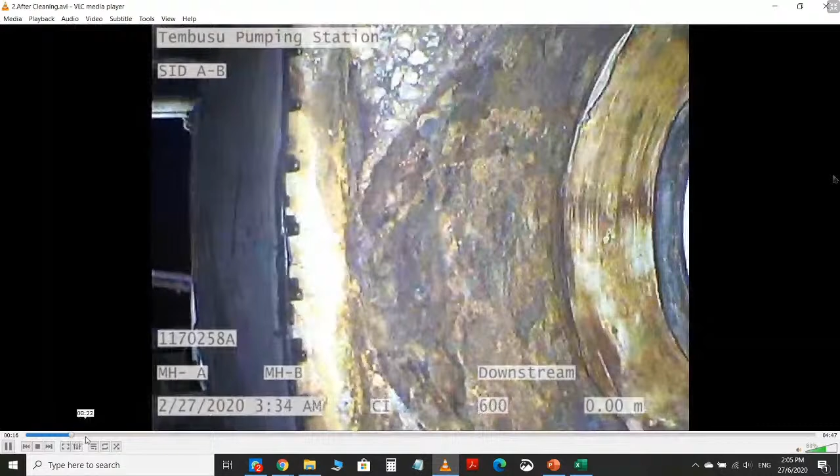So after we've done the pre-con survey, we will need to clean the pipes first. So for cleaning, we will use the jetting tanker and chain cutters. So this video is taken after pipe cleaning. You have seen in the pre-con how bad it looks, and this is the same pipe after cleaning. So now here you can see the pipe scale has been reduced.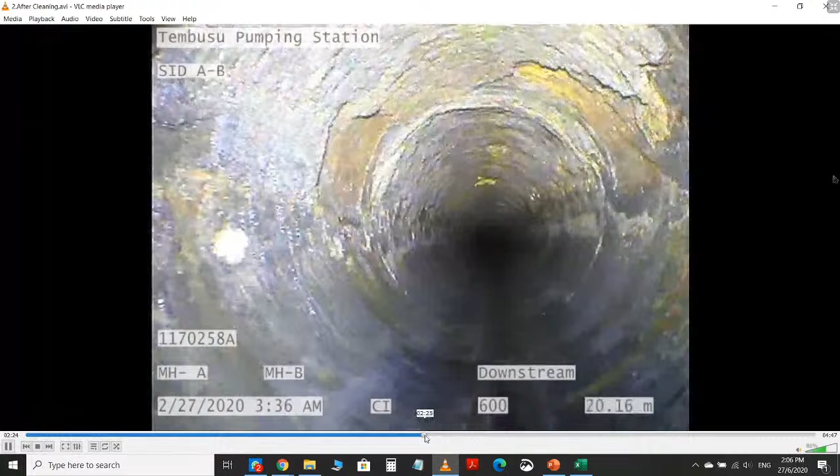We cannot remove the scales completely in a cast iron pipe, because if you remove that, then you will collapse the pipe entirely. If you see here on the side, the pipe's actual thickness is also reduced, and the pipe is in brittle condition now. So I will forward it. So this is how the pipe is looking after cleaning.

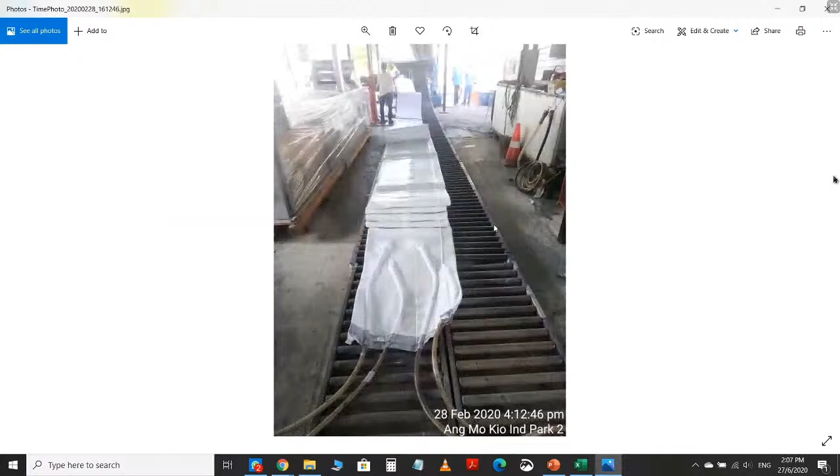This is the resin wet out area. You can see the liner, and these hoses are vacuum hoses. We are removing the excess air inside the liner so that the wet out process goes well and the resin gets saturated well. So after wet out, we fill the truck with ice.

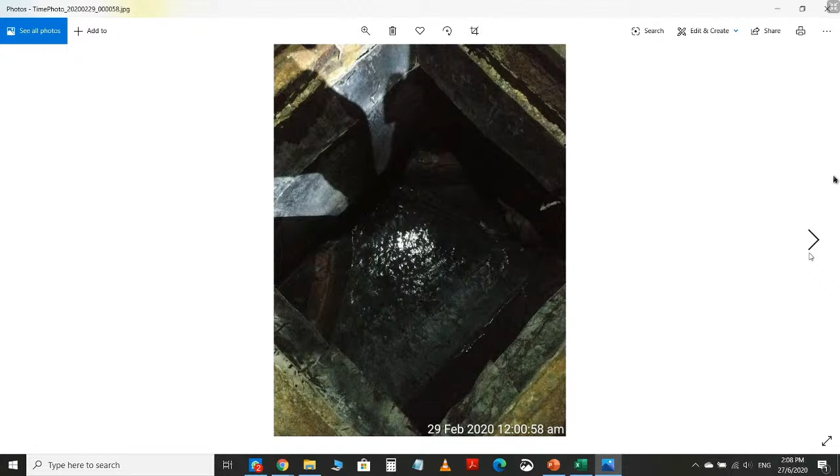And this is the manhole once we opened it, and we waited for the water to drain. In the pumping station, they switch off the pump for 8 hours for us to carry out our works. So as you can see, the pumping station is losing only 8 hours to renew this pipeline, compared with 1 month for replacing it.

6 workers, 1 supervisor, 1 engineer. That's all it requires to renew this entire pipe. And it took us 8 hours to renew this pipe.

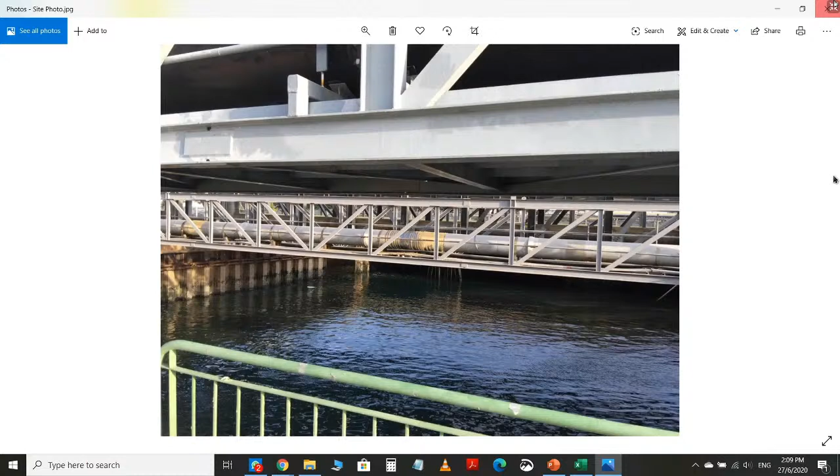So after installation, there is no more leak, and there is an increased flow capacity for the pumping station from the city area. So there is no more choke or no more water stagnant in the manholes in the city area. So this is one of the reasons, and I'll show you a CCTV report.

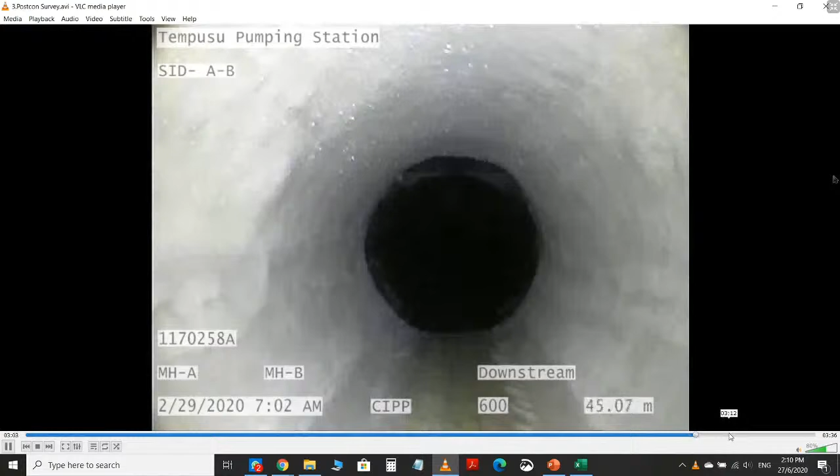And the survey has been completed. This is the post-con survey. So after the post-con survey, we will make the survey into the report. You can see the report here. This is how a CCTV survey report looks. So there are five classes of failures or five conditions.

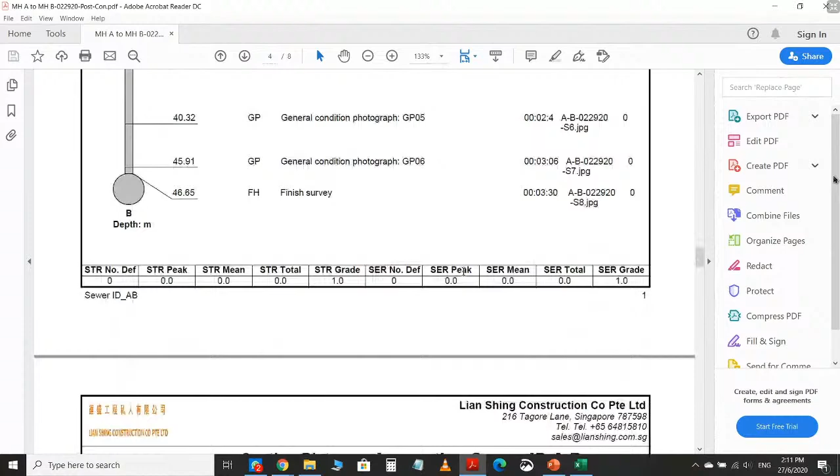And if you see here, this is the general details, and this is the pipe profile. And at each meterage of the pipe, what is the condition? It will be noted here with the picture. If you come below, start, then it is at 0 meters, then at 10.58 meters, then at 30.29 meters. So this is how the CCTV report looks.

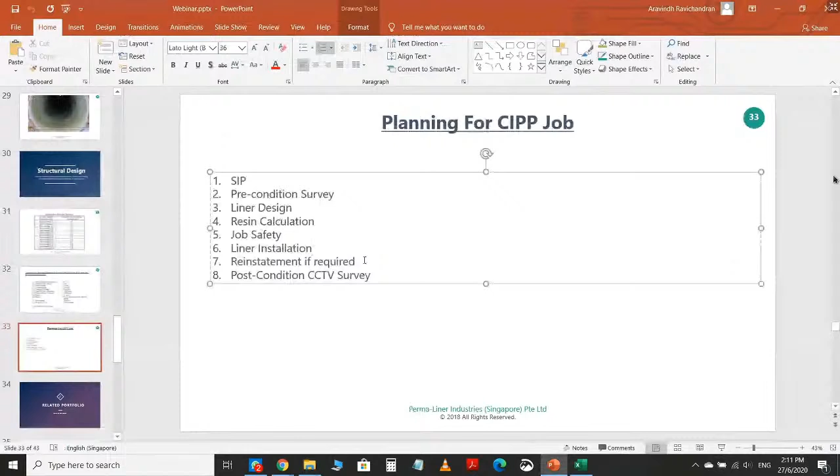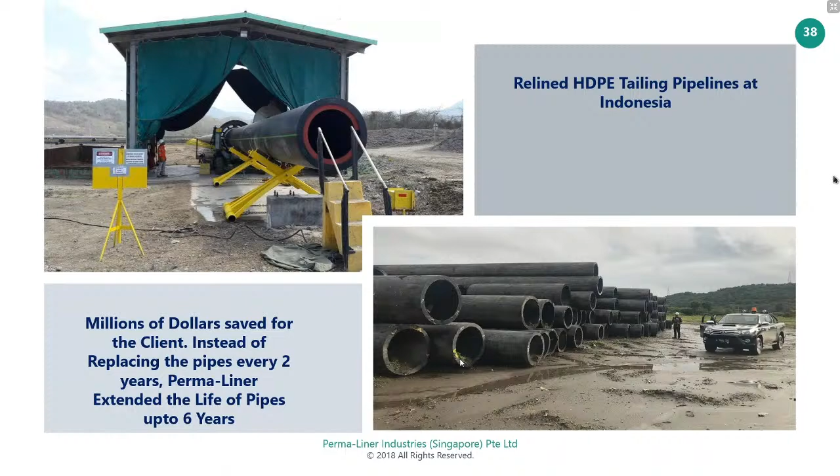So these are the advantages of lining trenchless technologies. And all the while we are doing this tailing plant, they don't need to shut down the pipeline for a longer period. As I mentioned, usually we take 8 hours to 14 hours for big pipelines. So that is the advantage.